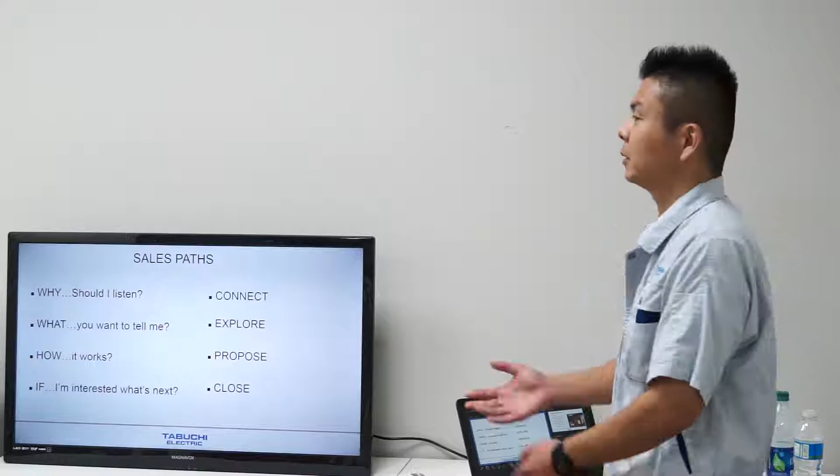And actually, this product is made in Japan. We manufacture this product in our Japan factory. And this is the sales path. I think mostly today, all of you are installers, so I will skip this slide.

So sometimes, if the inverter and battery are from different companies, you have to call the inverter company, and they say please call the battery company, and the battery company says something else. So I think that is not good for you. But you can call only us. Actually, me. You can call me. Then I can answer everything for our system, for the inverter and battery.

And installation is the same. This product comes together. The inverter, battery, components, cables, everything comes together. So it's like plug and play. So it's easy to install.

So who has installed a Tabuchi unit? No. We are interested. Okay. Interested. Okay. No. Okay. Yeah. No worries. You can install in the future.

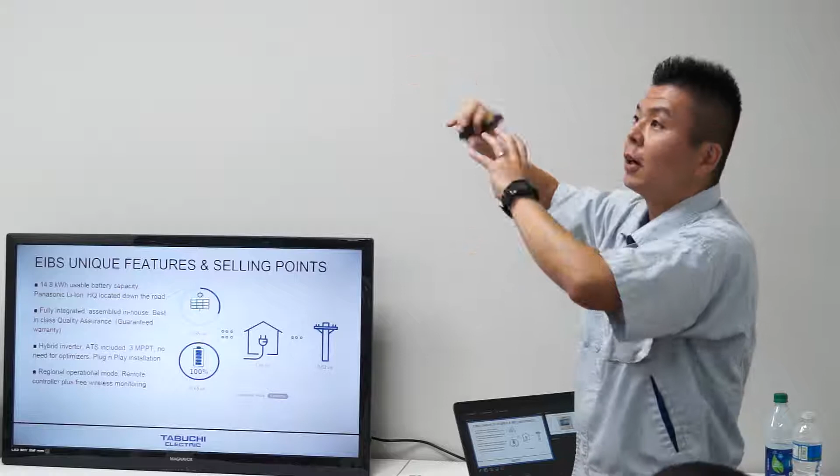Then economy mode is more flexible mode. So it depends on load and the generation. If the solar generation is bigger than house consumption, the power is charging to the battery. But if house consumption is more than generation, battery kicks on to discharge to the house. It's working automatically, more flexible. That's why the name is economy. And we have max power export mode.

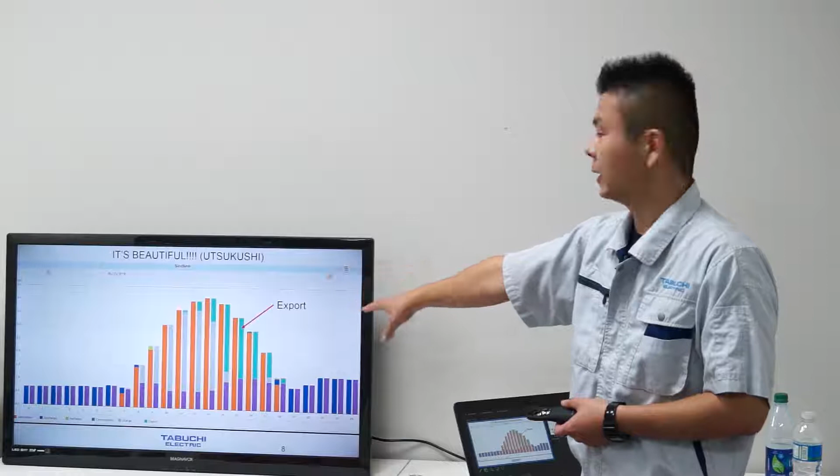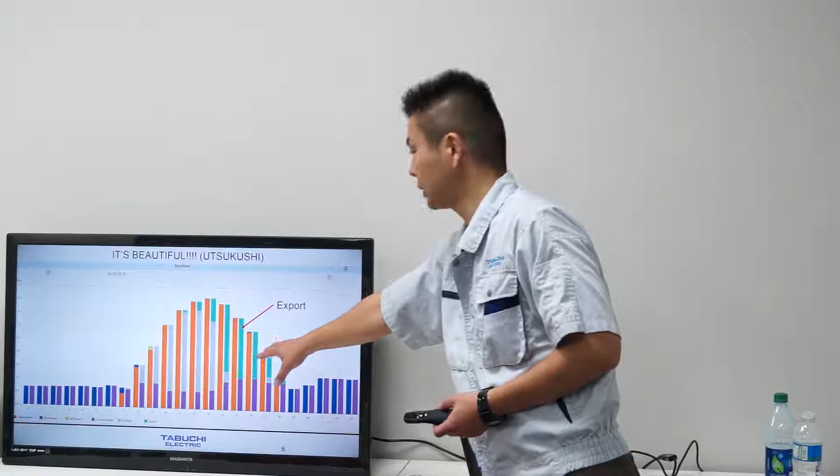We also have the web monitoring. So this is monitoring for daily data. Orange is solar generation, and this purple is house consumption. Then this gray is charge to the battery, and blue is discharge from the battery. So mostly off-grid, mostly self-consumption. This system, just a little bit purchased power from the utility here. I think it's beautiful.

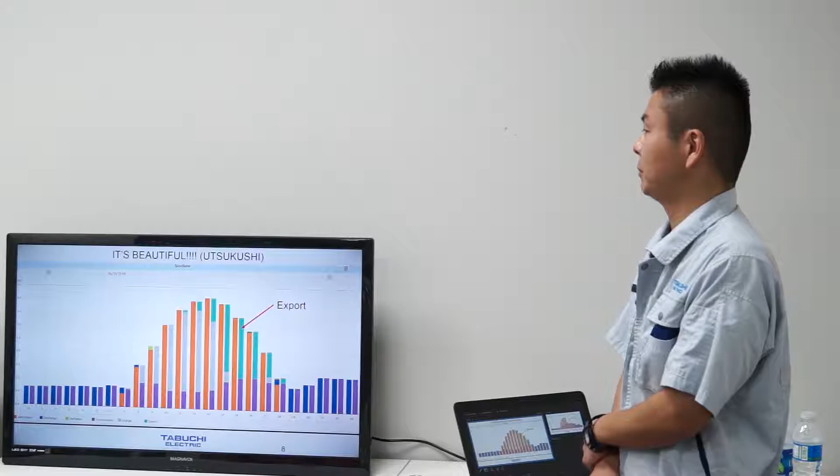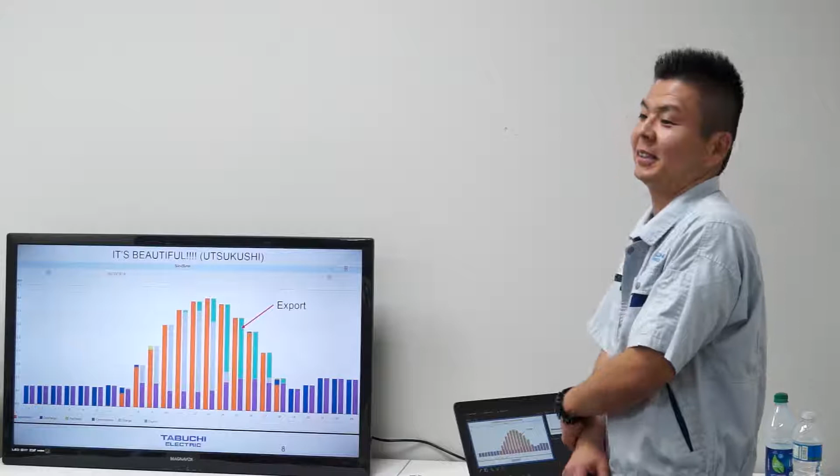Utsukushi. Do you know what utsukushi means? Beautiful, right? Utsukushi means beautiful in Japanese. Konnichiwa. Yeah, that's right.

So this monitoring comes with the system for free. Then this green is export power to the grid, but we have no export system. So this is another site with no export system. The customer has generation here, but he cannot export power to the grid. That's why power is curtailed. It's working automatically. We curtail power from the solar.

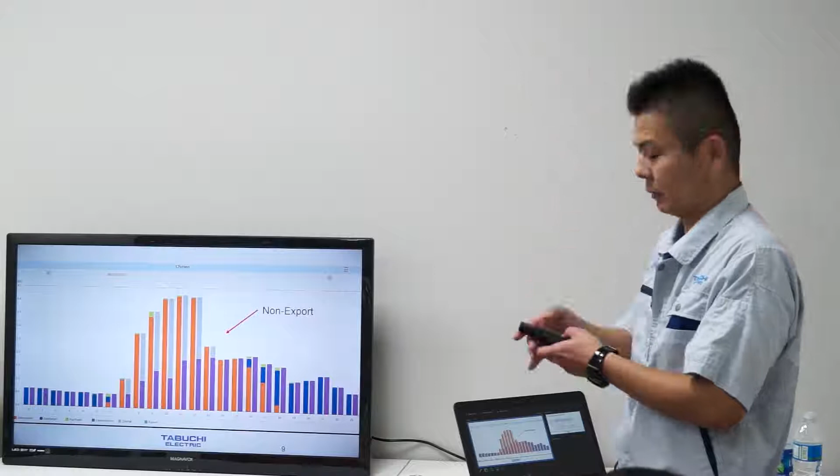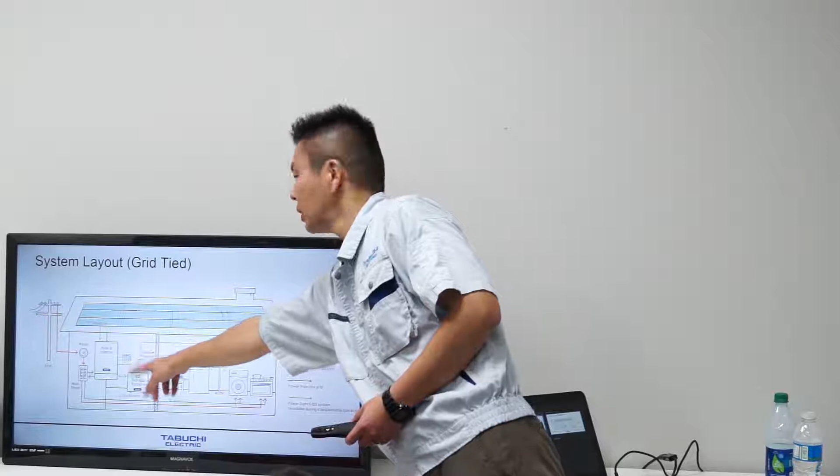So this is system layout for grid tied. This is our inverter and battery. Remote controller is here. You have to install a backup panel for the backup. And you can connect our inverter from the main distribution panel. These are backup loads and these are normal loads. You can use everything during grid tied.

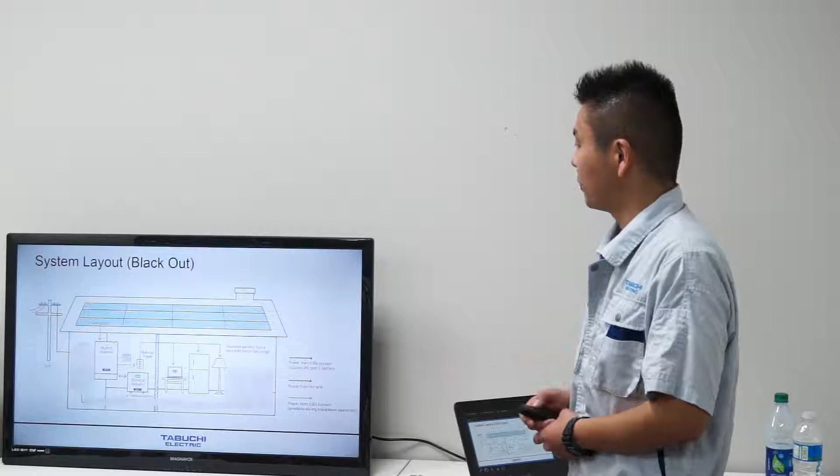Then during power outage, grid goes off, but you can use backup power powered by solar and battery. So for now, all 120 volt load. But we have a 240 volt option. I will explain later.

Then this is how our system works. This is the inverter. We have 3 MPPTs. The max input is 7.5. Even though inverter output is 5.5, you can use 7.5.

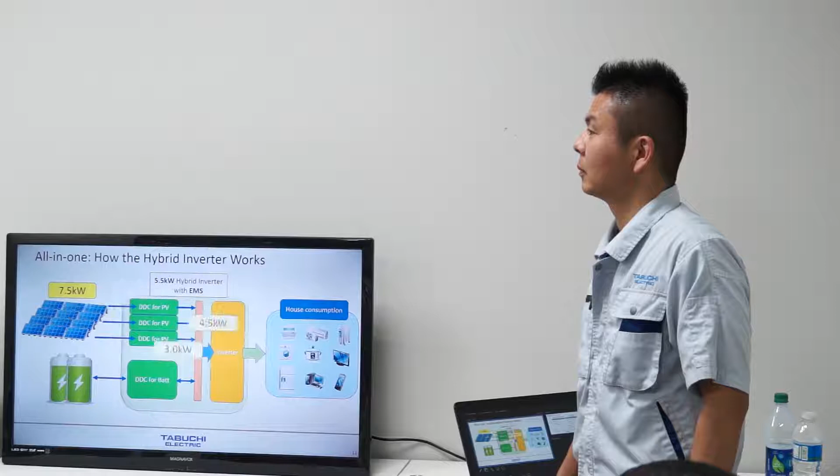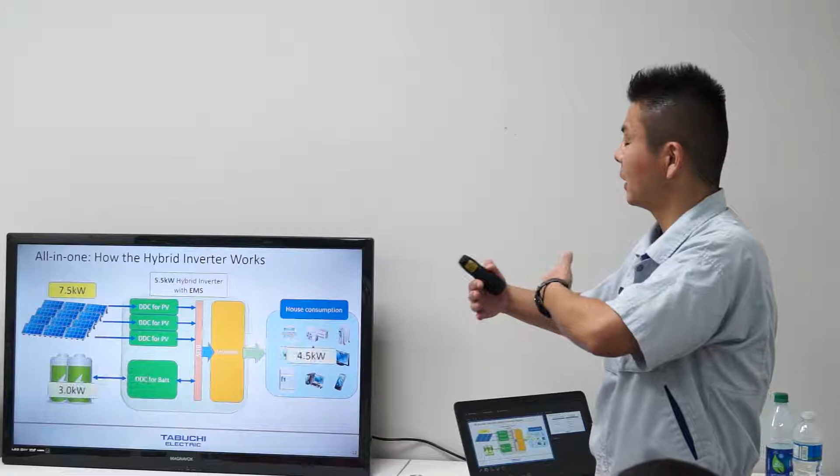If there is less power in the PV array, is there a way to know when the inverter is going to turn on and give power or give to the grid? I think the inverter is always on, but we can control the output of the inverter. How do we control the output? We have CTs on the grid side, so it depends on the CTs' information. The inverter can control the output. Okay.

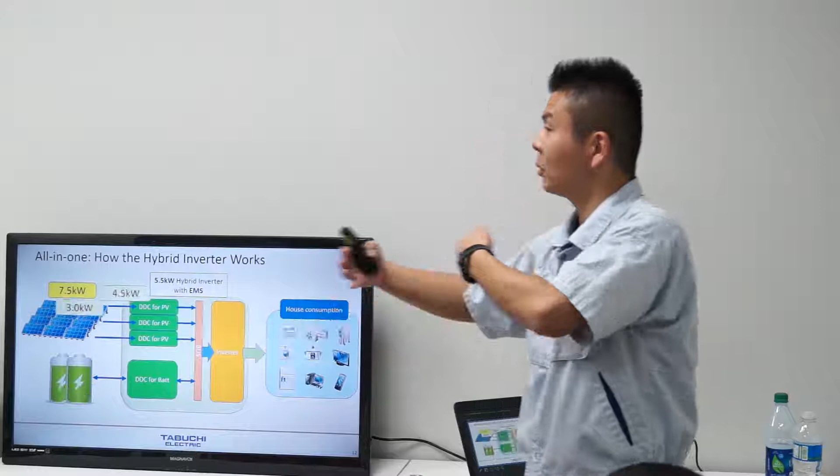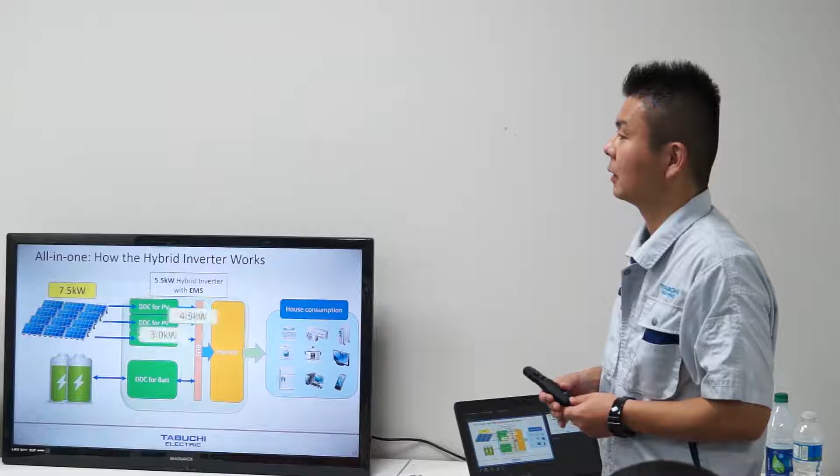I mean, if I have less PV array than my consumption, how does the inverter work? I mean, let's...

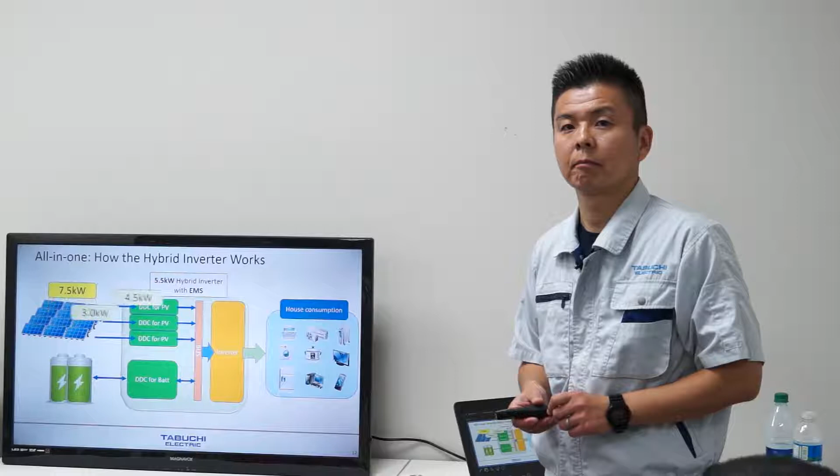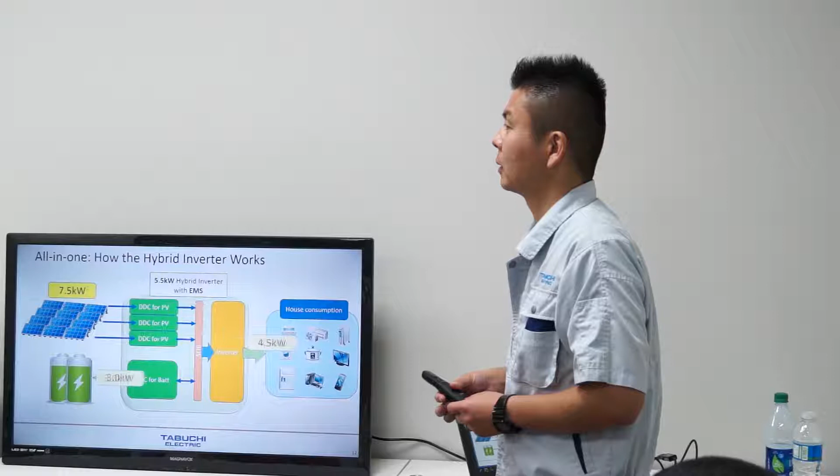He wants to know how he explains to his client how much is going to the battery and how much is going to the consumption. To consumption. It's working automatically. It depends. We have a priority to use power. First priority is solar; you can use solar first. Then if you don't have any solar, the second priority is battery, discharge from the battery. The third priority is purchasing power from the grid. This is our control. We have priority.

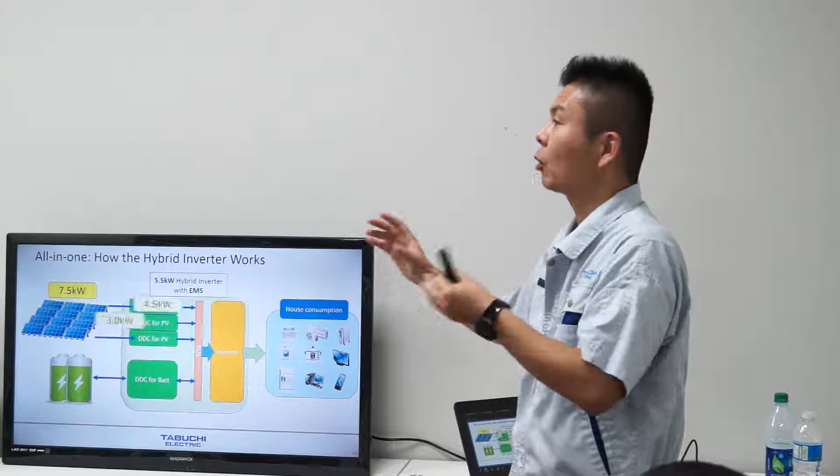How do the clients know where the power is going? Let me see if I can explain. You see the graphic that you have over there, the 7.5 kilowatts? How do we determine how many kilowatts are going to the consumption of the house, and how many kilowatts are going to the battery? You can see this monitoring. Now generation is 3.3. You can see it any time. Is that an answer? Okay. Is that okay? Okay.

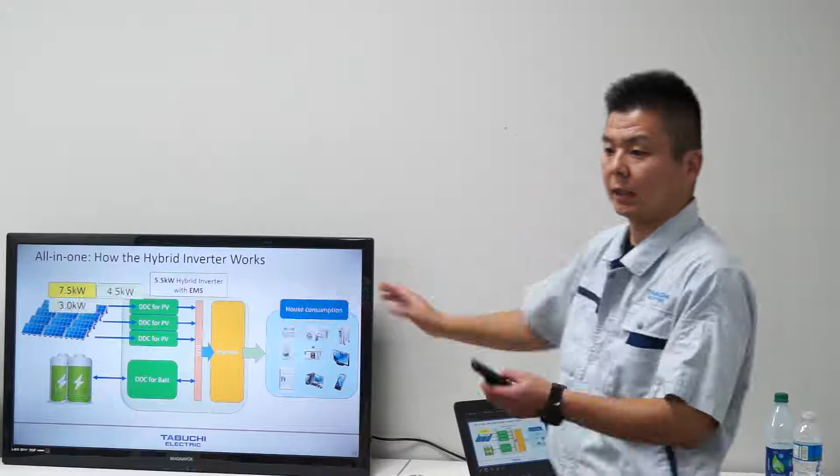Okay, so then you can use 7.5 from the solar. Right? Output from the inverter is 5.5, but it depends. If output is 5.5, 2 kilowatts are going to the battery. It depends on generation and the load.

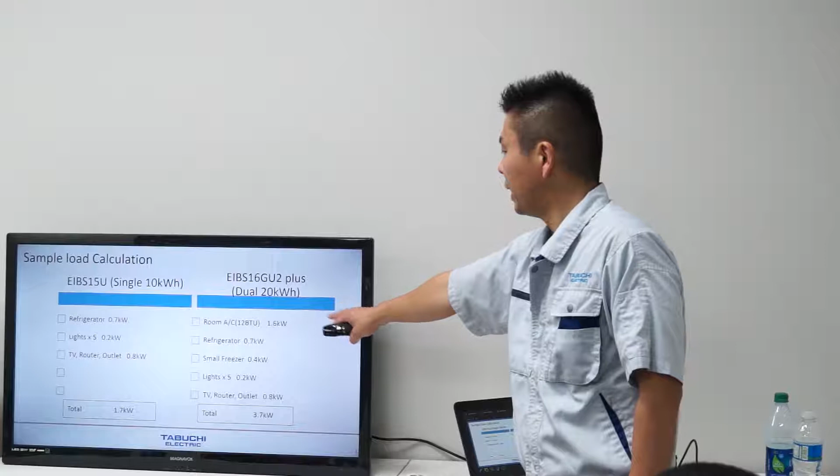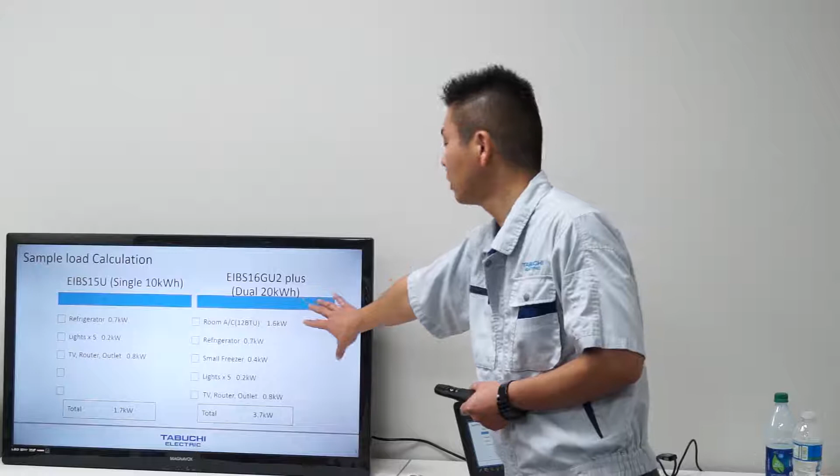This is a sample load calculation. We have a single battery unit and a double battery unit. Sample load for backup: you can put a refrigerator, some lights, and a TV router for one battery unit. Then you can put AC, refrigerator, freezer, light, and a router for a 2 battery system. But it depends on customer demand; this is the sample. You can follow this, or you can choose any load on the backup load. But maximum output is 4 kilowatts for 2 batteries and 2 kilowatts for a 1 battery system.

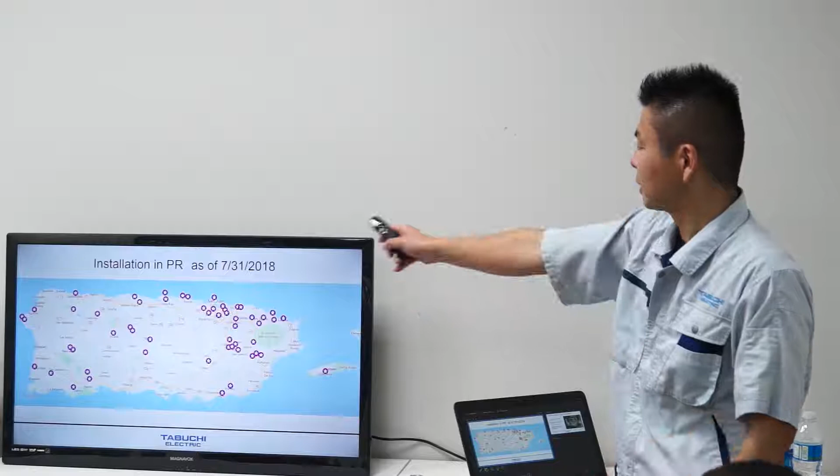This is the installation in Puerto Rico, but it's old. It's from July, so we've put in more. I have to update it, but now we install in Puerto Rico. I think we installed one site in Ponce as well. Yeah.

So this is how to design the 3-string PV MPPT installation. The more important thing is the input voltage per string. We have 2 systems: 16GU2 is the 2 battery system, and 15U is the 1 battery system. The voltage is different. The 2 battery system has 600 volt input for each MPPT; I think you can install 13 panels per string. This is the maximum. The 1 battery system has 450 volts, so you can install 11 panels per string. But you should calculate. I think you are familiar with this kind of thing.

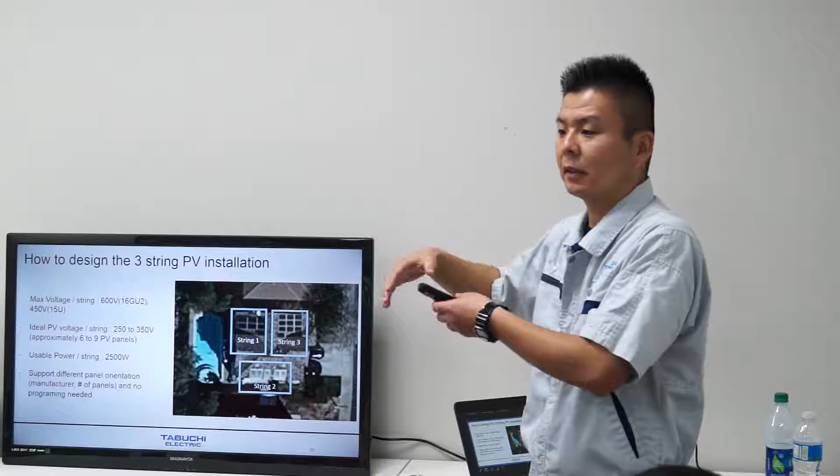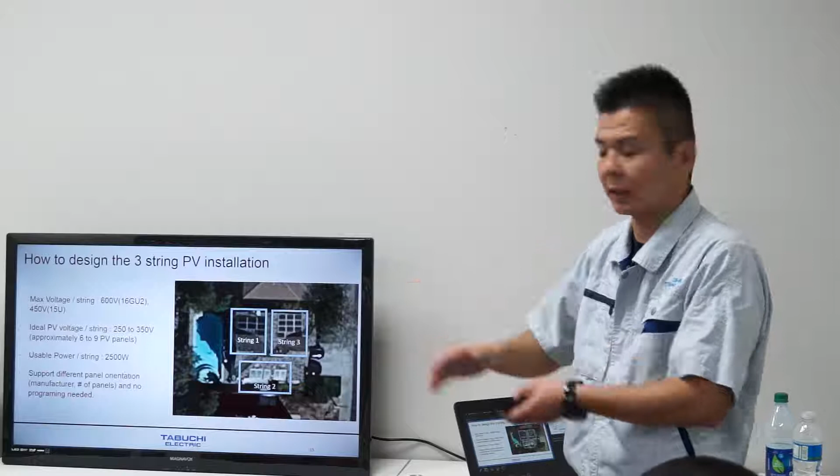The ideal PV string voltage is 250 volts to 350 volts, which is 6 to 9 panels per string. You can install more, but it costs more. How many panels did you say before? 13 maximum. Oh, okay. Maximum. But 6 to 9 panels is a more ideal installation. But it depends. That's because of the efficiency? Efficiency, yeah, and voltage and cost. You can install more, but power is curtailed. It doesn't make sense to install more. Usable power per string is 2.5 kilowatts, which is 7.5 for total input.

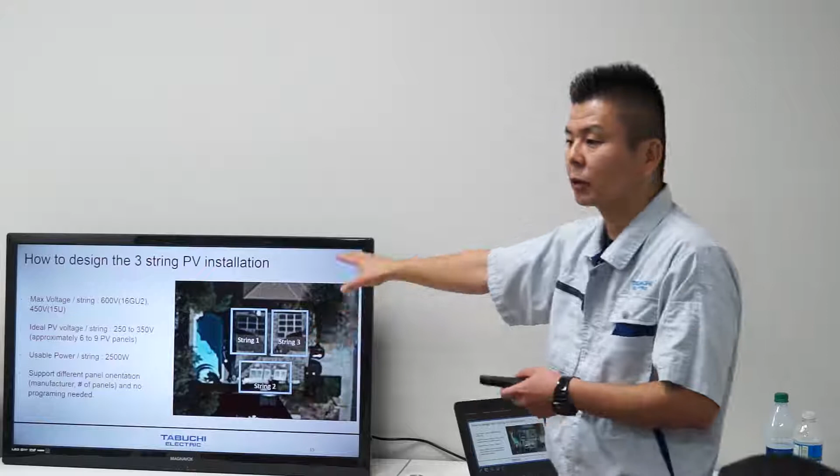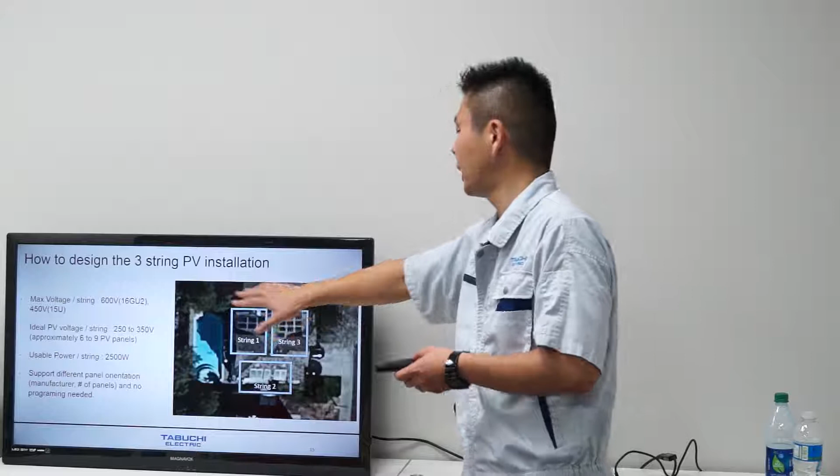Then you can use 1 or 2 strings. You don't have to use 3 strings; just 1 string is okay. You don't have to do any programming, anything. Just input for each string. The minimum input is 5 panels, 1 string. Then you can put the south side, north side, and east side; you can put any side on the inverter. Each string has MPPT, working independently.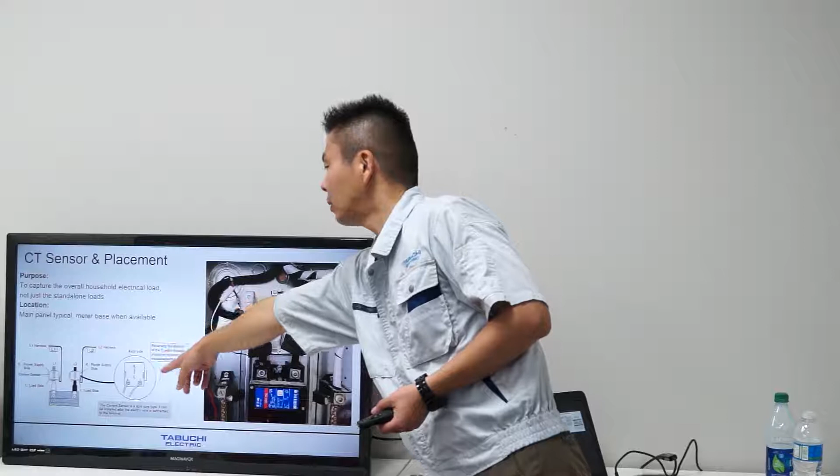So this is the most important thing for installation. We have CTs, current transformers, to have grid information. The CTs come with the system. Then you need to install these CTs correctly. A CT has a direction and polarity. You can see K and L on the CTs. K is grid side, L is load side. Please make sure to keep this direction. And we have polarity, L1 and L2.

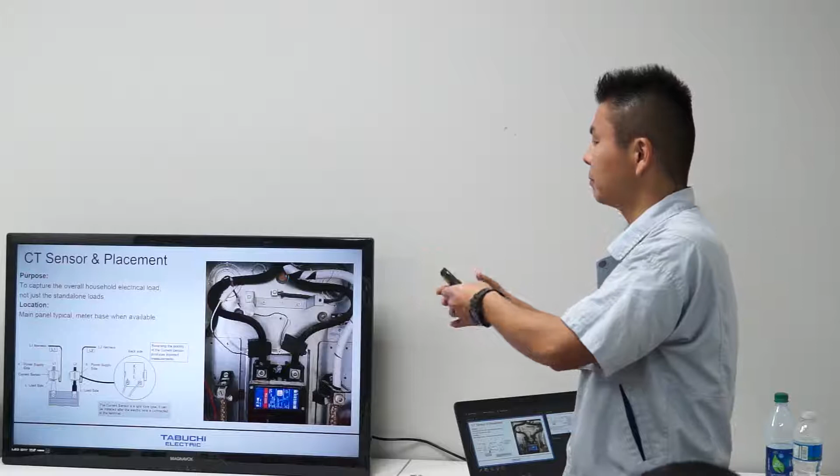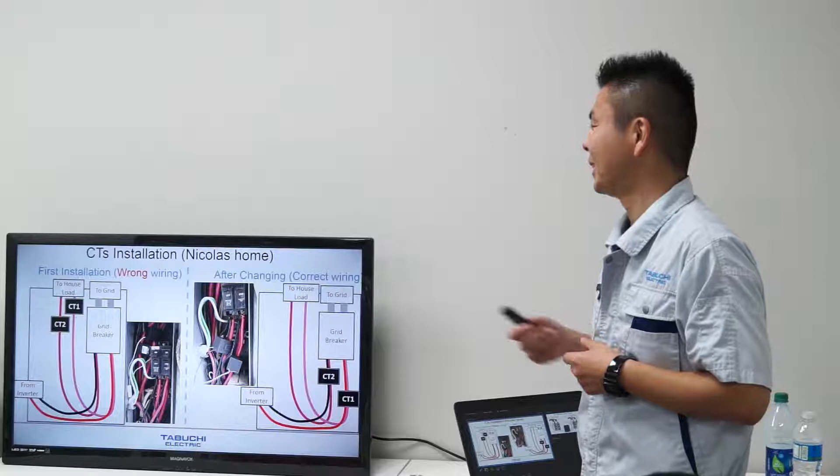As I experienced, this is the most common issue. I got many calls from installers about this: it doesn't work, the CT doesn't work. This is an easier installation, but I can see some complicated panels. We didn't know, but now I know. I visited more than 200 houses over 2 years, and there are many types. So the solution for now is please call me and do FaceTime or Skype, and I see that line. There are more than 100 types of distribution panel.

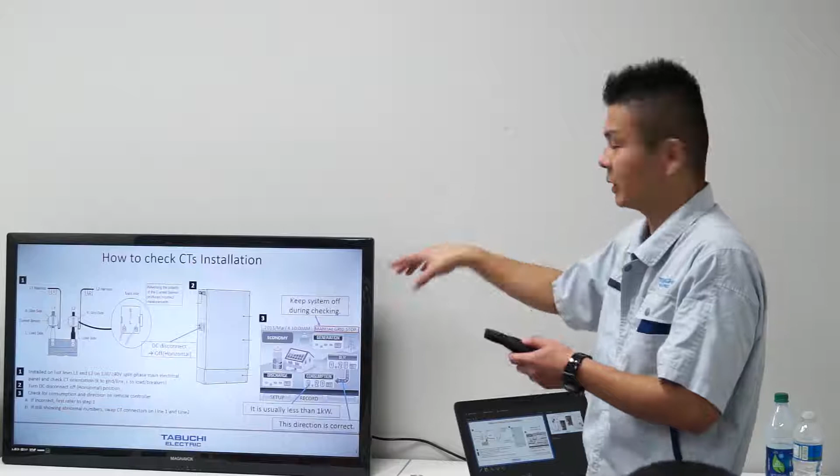So this is how to check CT installation. Please check this document later. You have to check this number, house consumption, just after CT installation. It's not easy to explain everything now, so let's check this document later. If it's wrong, it's going to show selling. Sell and buy. We have to have the CTs to have grid information.

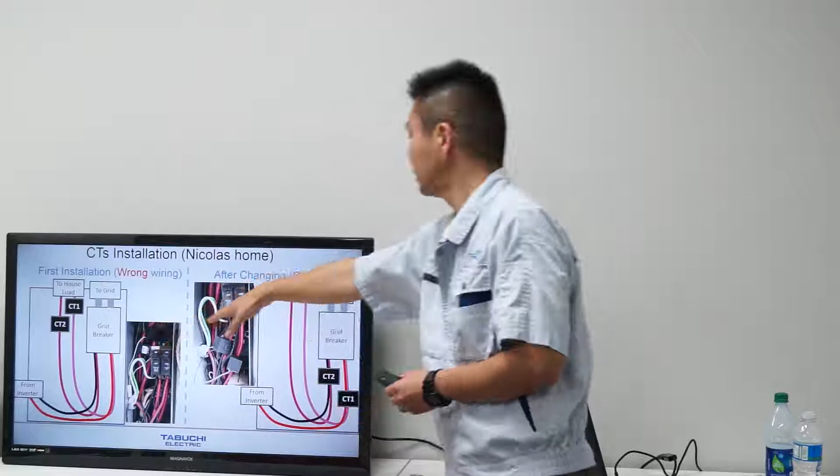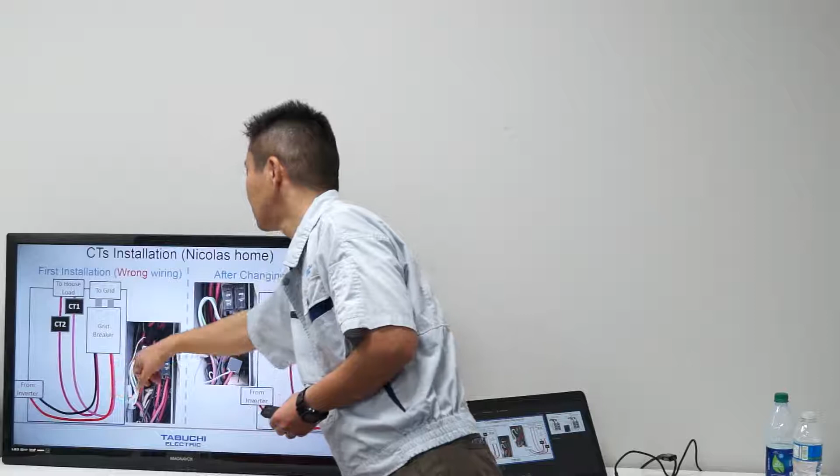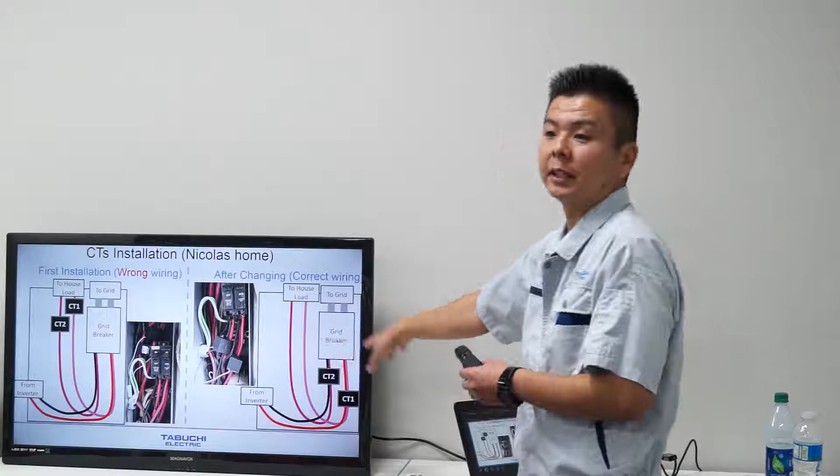So this is the wrong installation, and this is the correct installation at site. Sometimes the breaker has 2 or 3 lines, but this installation was just 1 line on the distribution panel. We need to have the inverter line and house load line both on the CTs. The CT needs to have all information, load and inverter information. That's why you have to clamp 2 lines on the CTs.

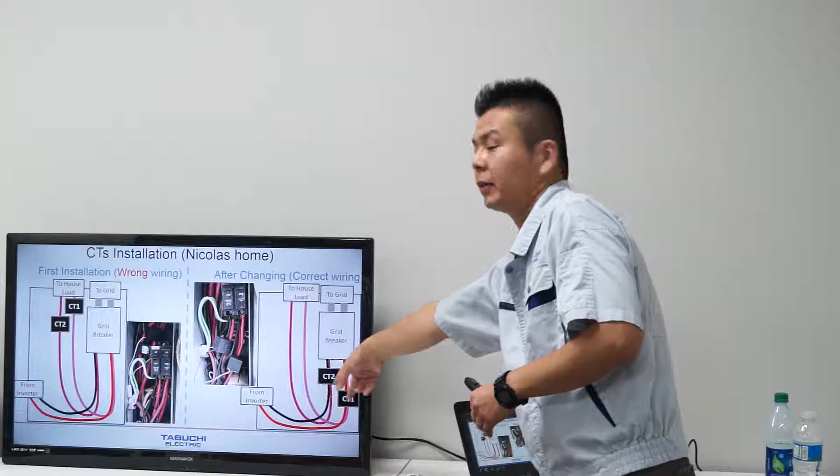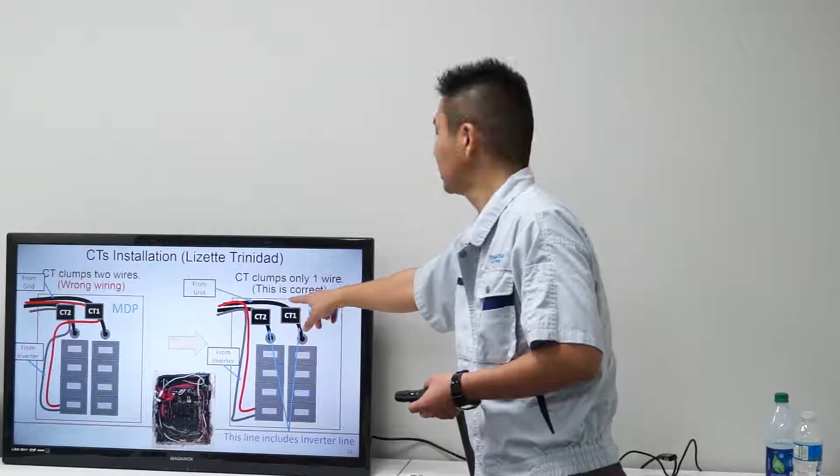Another case is if you install the inverter with a 30 amp breaker here on the distribution panel, you don't have to clamp 2 lines because these lines already have inverter information. If you use 1 breaker for the inverter on the main distribution panel, you can clamp CTs on the main line. Just 1 line is okay. We need to have all information on the CTs, and this line already has all information. That's why it's different.

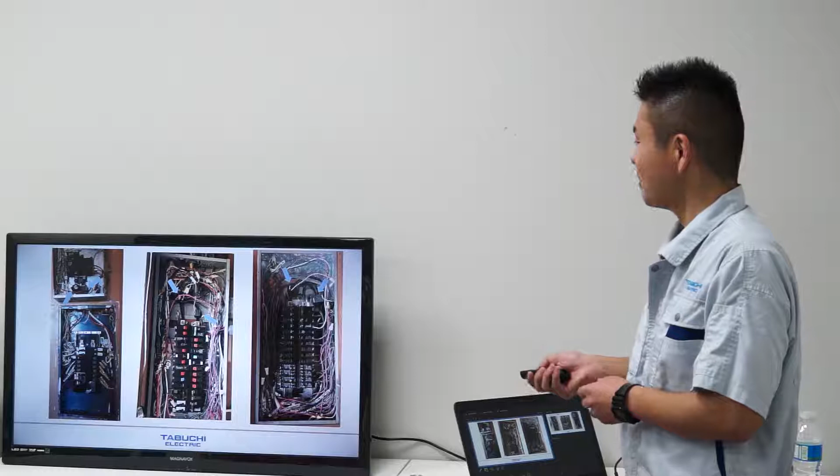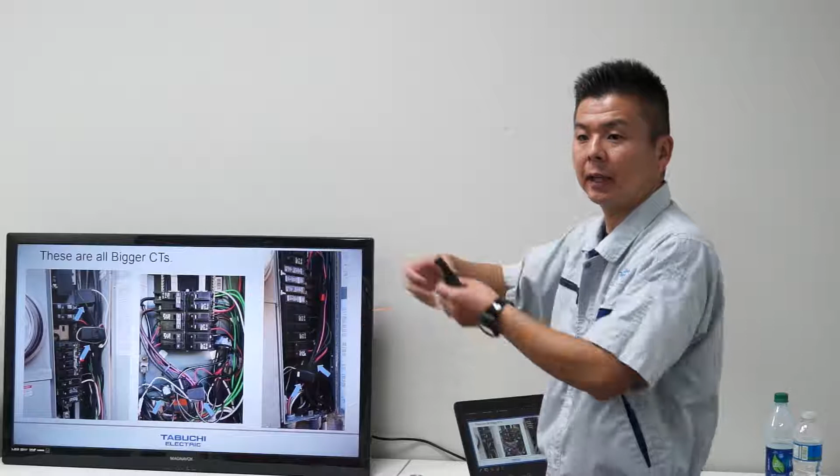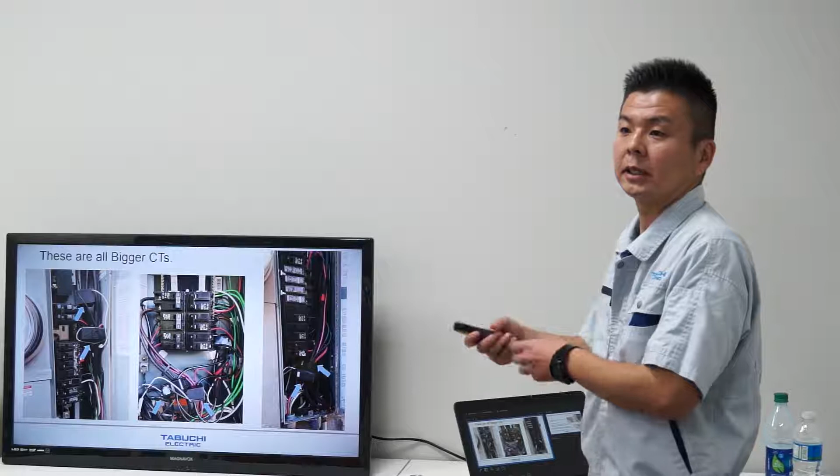So this is, how should I say, CTs here and there. It's complicated. And we have bigger CTs, because there are many types of panels and there are many wires. That's why we have a bigger CT to clamp many wires. This is an option, so please ask us for the bigger CTs. The system comes with the smaller CT. But for now, about 10% of sites need bigger CTs.

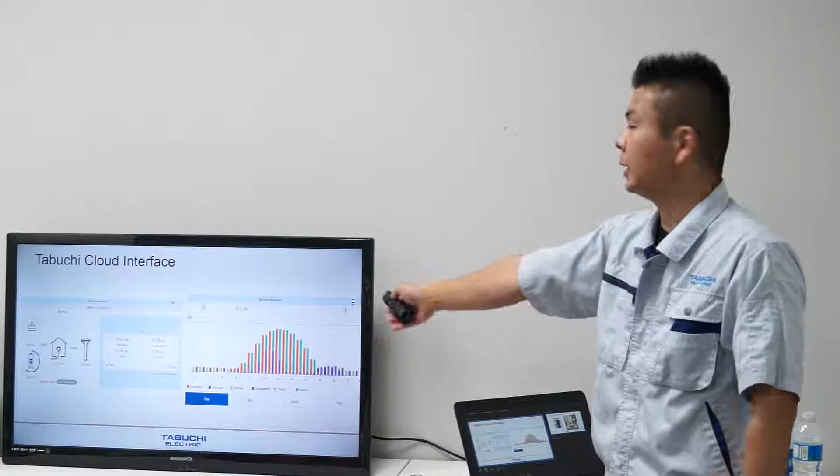Good. Then this is our cloud interface. You can see the dashboard and the information. And this is the energy graph for the system. This is daily data; we have weekly, monthly, and yearly data as well. You can see everything on our cloud, and you can also see it on a smartphone as well.

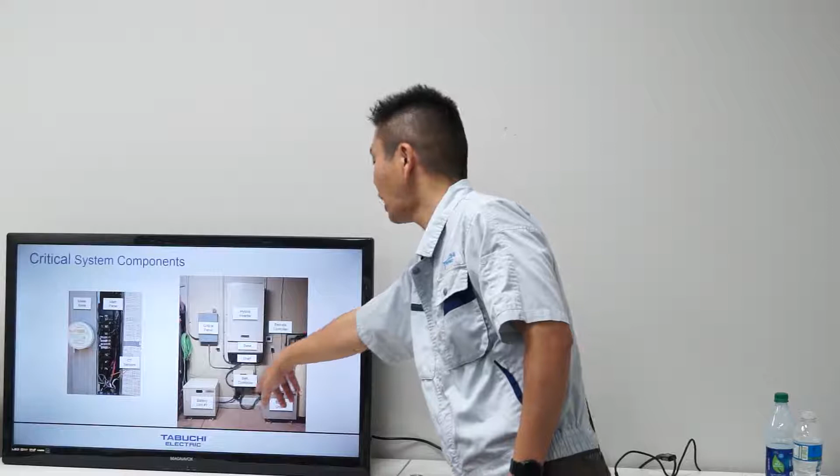This is standard installation. For example, we install CTs on the main distribution panel just after the meter. Inverter comes. This is a base and shelf. You can use the base and shelf to hook up on the wall. This system is a 2 battery system, so you need to have a battery combiner box for a 2 battery system.

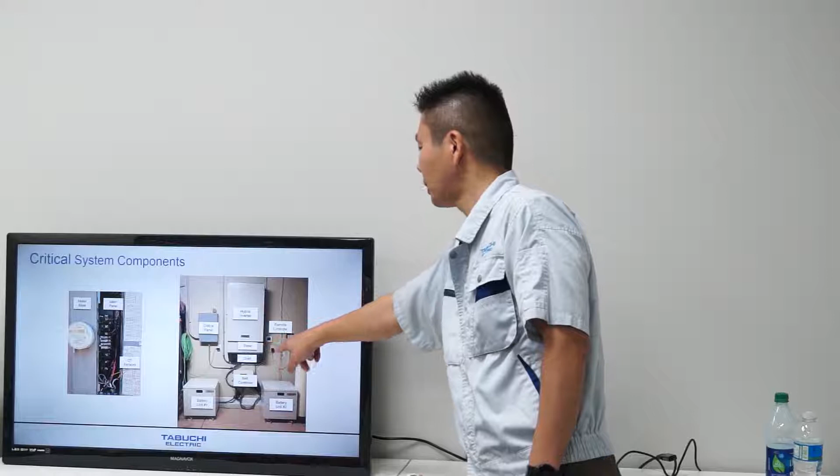You don't have to install this box for a one battery system. This combiner box is only for a 2 battery system. Then this is the remote controller, and you need to install a critical load panel, which is the backup panel. It's not included. Please prepare that box. And this is the remote controller.

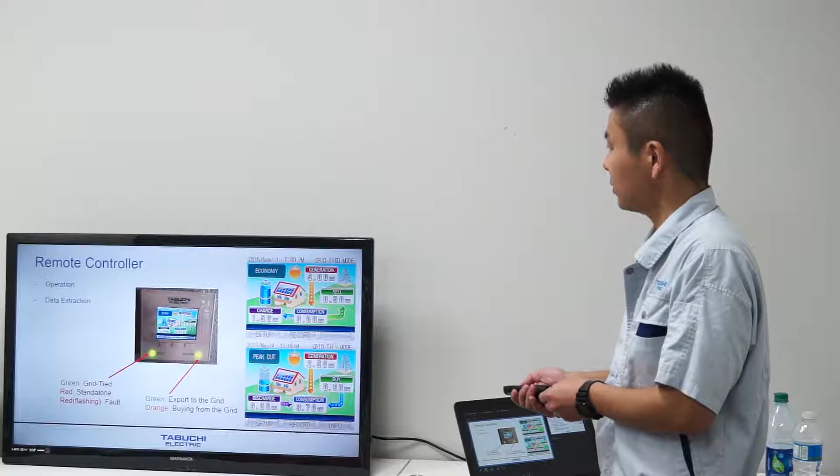How you can see the remote controller: this is solar generation and house consumption, and power is going to the battery, and excess power is going to the grid, but only for an exporting system.

Then we have indicators on the remote controller: green, red, and orange. The left indicator green is grid tied, red is standalone, and the right indicator has green and orange. Green means export power to the grid, and orange means buying power from the grid. This is the indicator.

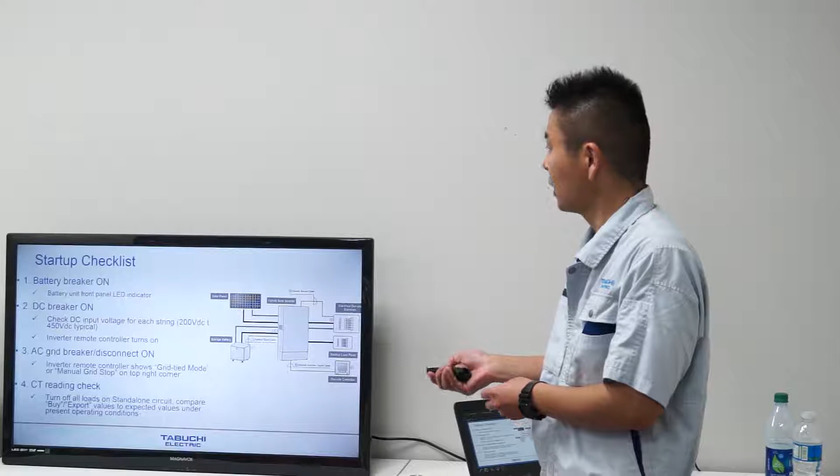And this is the checklist for startup. Just after install, you can check everything. Battery on, DC breaker for PV on, the AC grid breaker on, and CT check. This is the checklist for just after installation.

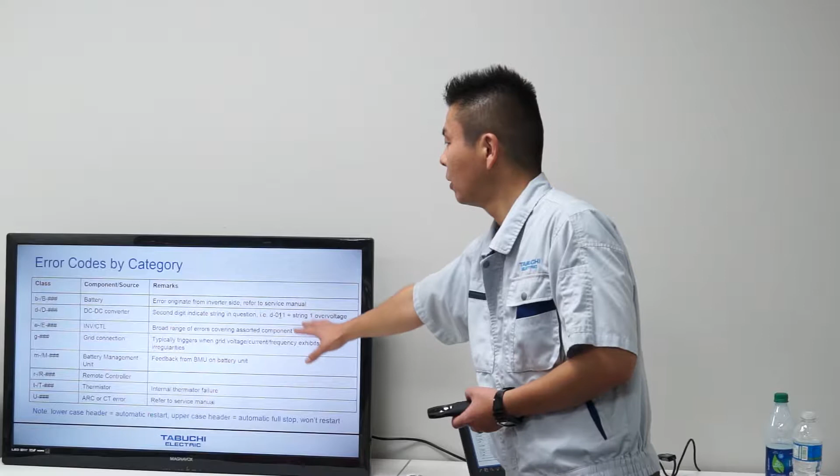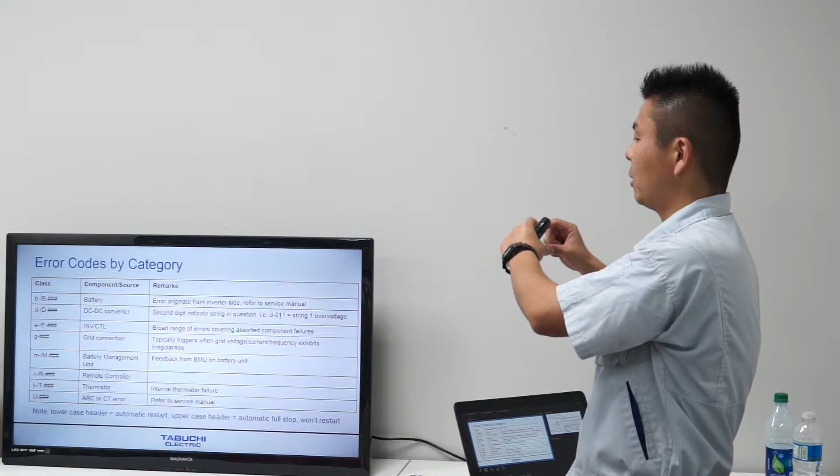And this is troubleshooting for the inverter. This is the standard error code of our system. Error codes show on the remote controller, B101, U026. There is always an error code on the remote controller. So if you call us for installation, please tell us the error code. Then we can see what's going on. We can understand.

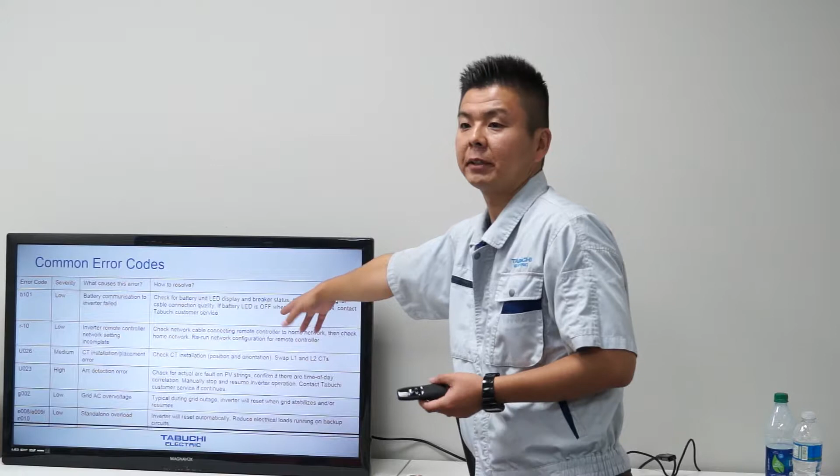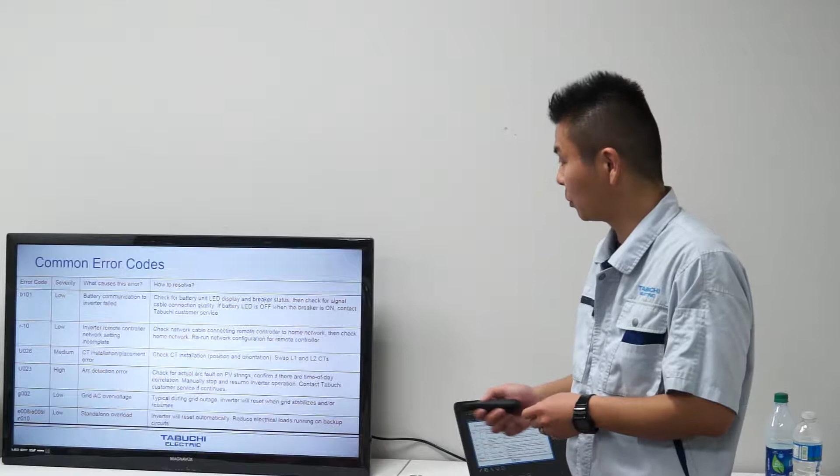So this is the most common error code just after installation. B101 is battery is off, or battery communication is loose. So please check it. This is the most common error code just after installation. Mostly 80 or 90% of error codes are these.

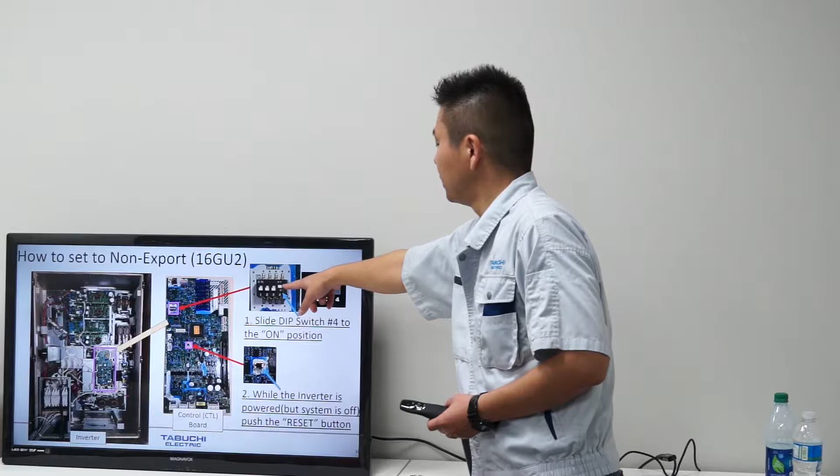And this is how to set no export mode. We have a dip switch. This is the control board inside the inverter, and we have the dip switch here. Number 4 is for export and no export setting. So if you want to set no export mode, please turn number 4 on and push the reset button. That's it. You can set.

Are we going to have this presentation for us, or it's only for this? You can send everything. Sí.

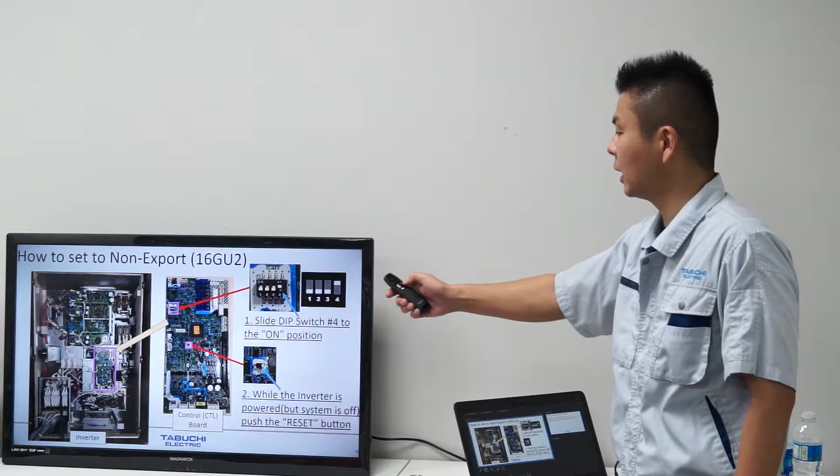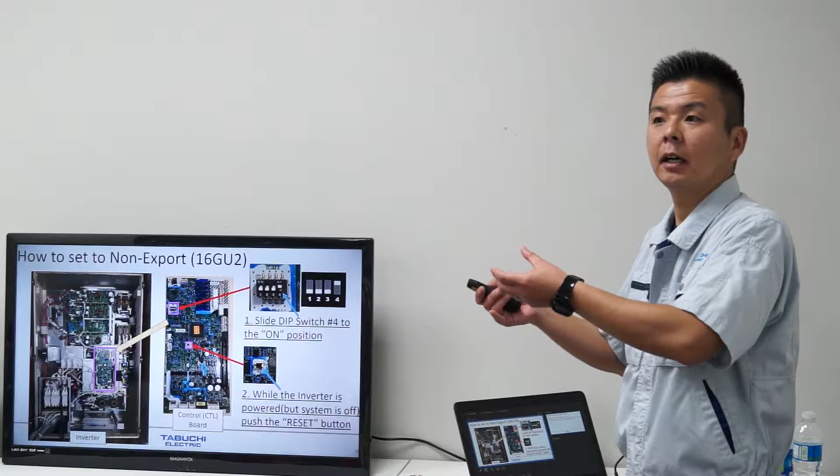Okay. And the no export mode, we can do that all in the 16 GU2, right? Right. Not the 15. All 16 GU2. Well, what about if we want to apply it in the 15 GU2? We have to update or change software. And we have somebody available here in Puerto Rico to do it? Yeah, I can do it, but I will teach Maximo Solar how to do that. Yeah, then I think that would be easier. Yeah.

Yeah, as I mentioned, the 15GU2 needs to have a software change. So we can do that. I will teach Maximo Solar to change no export for the one battery system.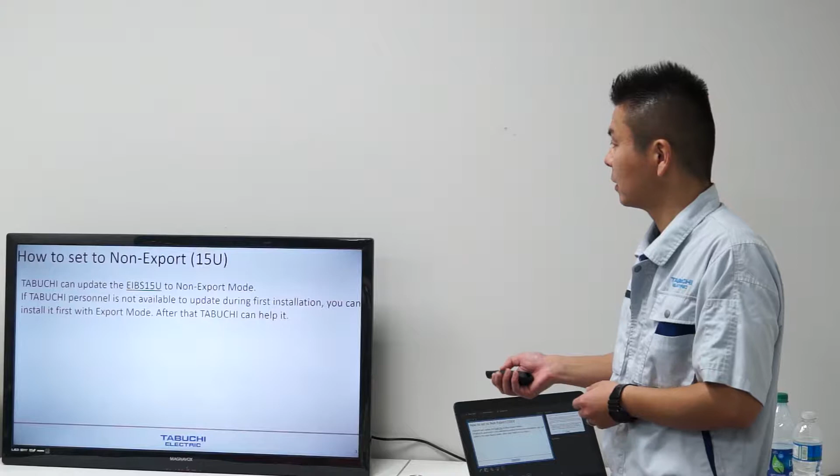And this is how to provide 120/240 split phase output for critical backup load. We actually have 3 types of inverter: one battery system with 120 backup, 2 battery system with 120 backup, and 2 battery system with 240 output. But 240 is single phase, only single phase. That's why you need to have a transformer to have 120/240 split phase, even for the 240 system.

Is that model currently here? Not here. We have inventory of the 240 system in California, so we can send it, or we can update. We can upgrade to the 240 system from the 120 inverter. Just a software change. Software. Yeah, software change.

So actually we installed 15 to 20 units of 240 volt with transformer. Yeah, because it's needed here. Yeah, air conditioning is important. So I did the update on site from 120 to 240. That update, who will make that update? We can update, and we will teach Maximo Solar how to. Yeah. We don't have that option to make the update. Only you or Maximo. Or you can provide the update for us.

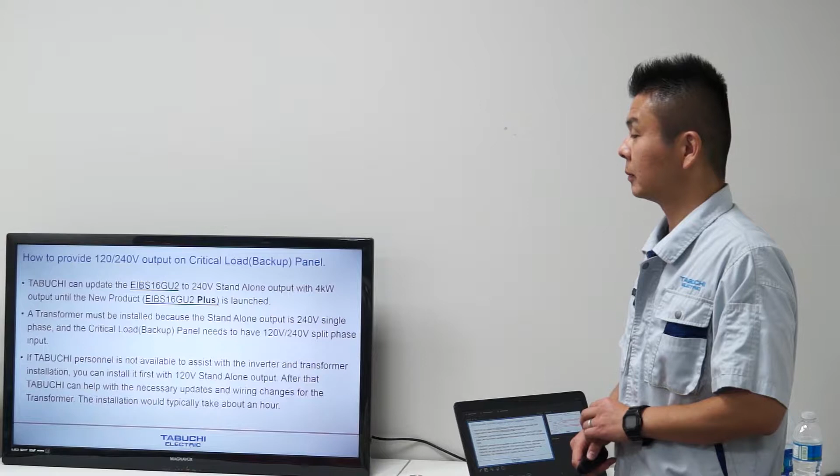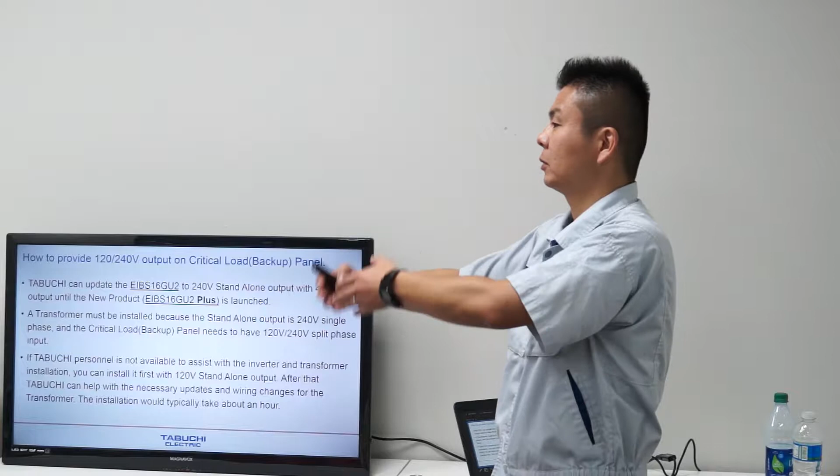But is this transformer only for the 2 battery system, or can you use it in 1 battery? You can use it with the 1 battery system as well, but your output is 120, and you can boost voltage from 120 to 240. You can use 240 for the 1 battery system, but output is only 2 kW. I don't know if it's enough for 240 load.

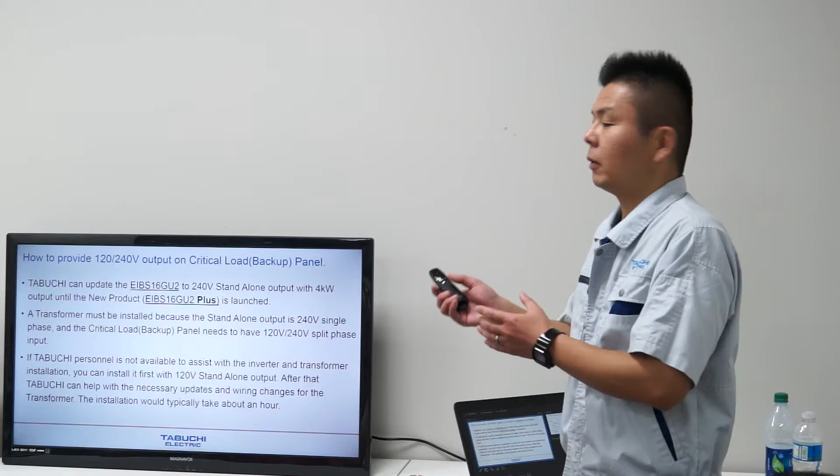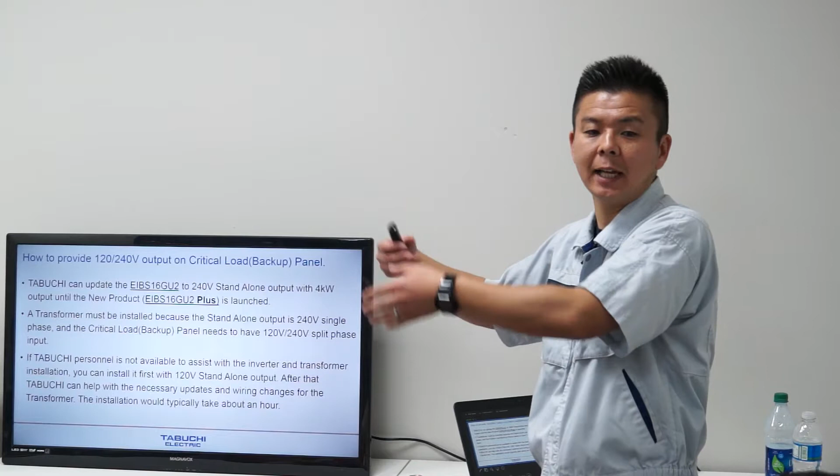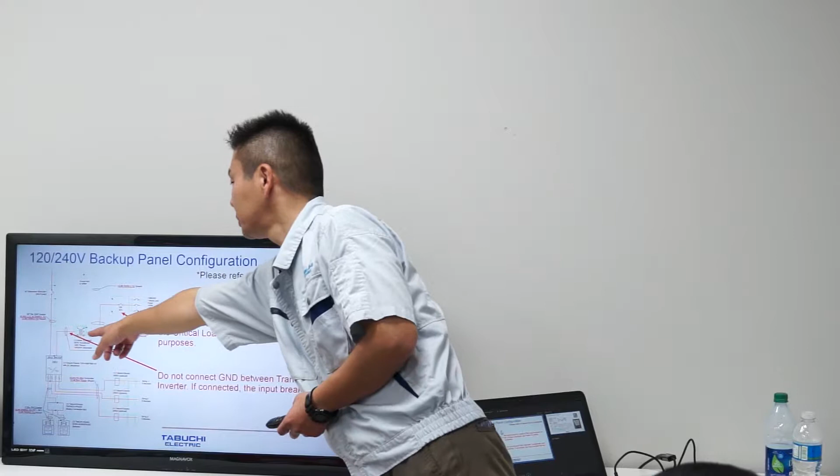So then you can, for 2 battery system, you can install transformer with 120 for installation, but we can change later, so you don't have to wait. It's, yeah, it depends. This is single line drawing to have transformer. This is the transformer and the backup output with transformer, and this is the backup load. So then please check this single line drawing later.

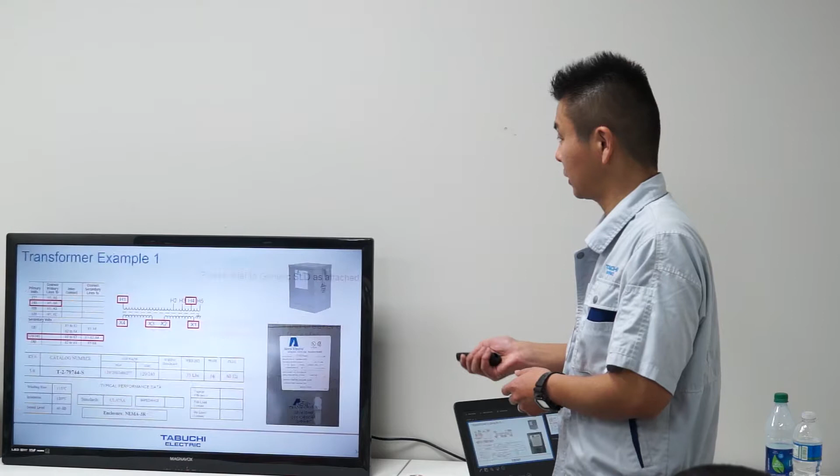So you need to prepare a transformer to have 240 system. This is just example. We use this transformer, and we use this transformer as well. HPS. I'm sorry. Warranty will be more if you use... No, this is not our product. So we can use another one with UL that is capable to run the equipment. It doesn't have to be those 2 ones. Any transformer is okay. But you have to use isolated transformer, not an auto transformer. You need to have isolated transformer.

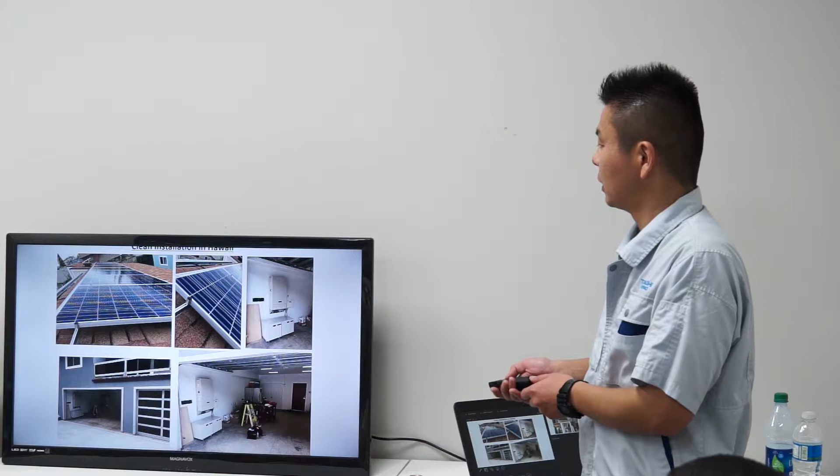And this is the installation in Hawaii. We installed this system in Hawaii. I like this installation. It's clean, I like this one. And we provide installation support in Puerto Rico. Sorry, I have to hide this company. But I go to sites in Puerto Rico, more than 50 sites: near San Juan, Ponce, Aguadilla, Rincon, many places in Puerto Rico. And we also donated our product in Puerto Rico and Virgin Gorda, British Virgin Islands. We donated as well. So this is it from my slide. If you have any question, feel free to ask me.

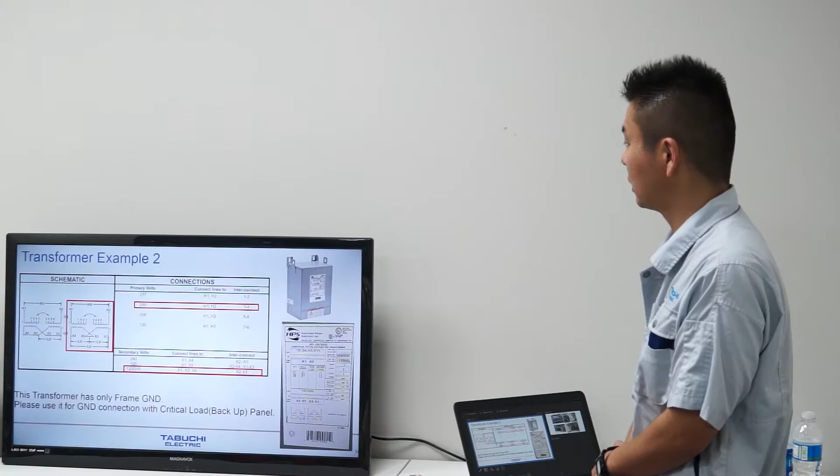Go to the other slide where they had the installation, the last one. This one? The other one. Okay, you see that scenario right there? We're in the tropics. How do you protect those panels, with an installation like that, from the wind? From the wind. Actually the PV panel is not our product, so I'm not familiar with this panel. I see. Sorry about that. Okay. Any questions?